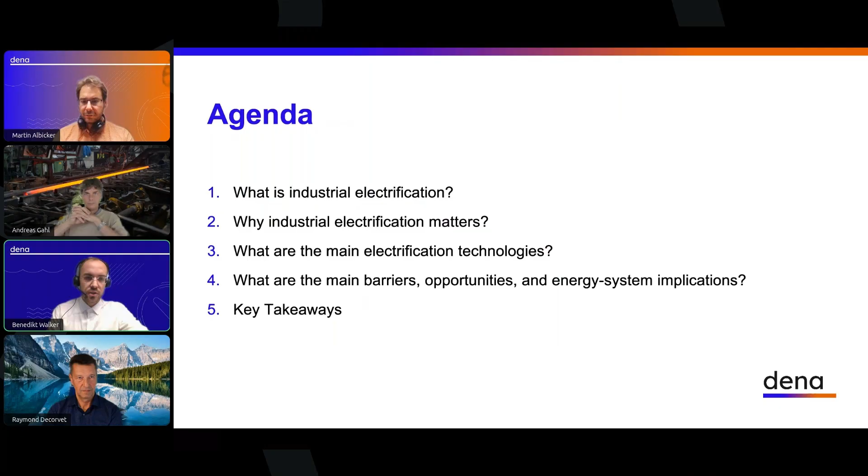To give you a bit of context on what the German Energy Agency is doing and who we are: we're a publicly owned company founded in 2000 by the German government. Since then, we have implemented a wide range of projects in over 60 countries and are currently working on over 100 of these projects. In general, we mostly consult the German government in terms of strategy and advice.

We conduct studies and analysis for the German government, but also for private stakeholders, do market analysis, and have a pretty extended network, primarily by organizing stakeholder processes. We also have a communications team working on reports and informing the public on energy transition topics. Our agency is structured along a wide range of energy transition topics, and most importantly for this topic, we have a division working on the transformation of the economy and industry, where we work on industrial electrification, process heat, and so on.

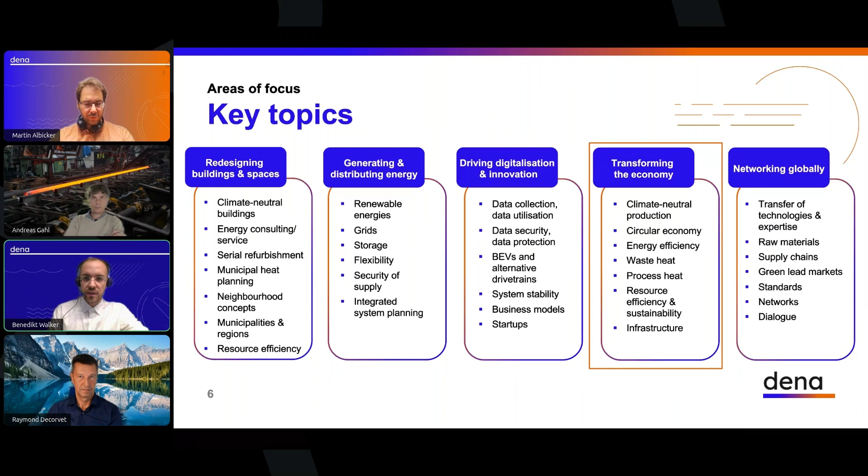So to come straight to the topic, what is industrial electrification? It essentially refers to the replacement of fossil fuel-based industrial processes with electricity-based industrial processes. You can imagine it as replacing, for example, a natural gas boiler with an electric boiler. The statistics may be a bit different in different regions of the world, but today industry is mostly based on fossil fuels, both as feedstocks and for its energy demand. In the European Union, currently natural gas, besides electricity, provides the biggest source of fuel, and then a whole range of other fuels come after.

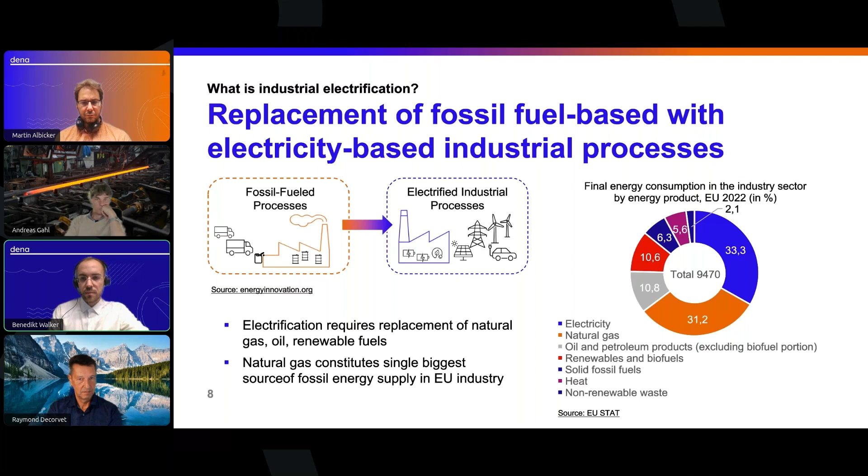In different regions these statistics may look a bit different, but the overall picture is similar around the world. So why does industrial electrification matter? Industry causes roughly a third of global greenhouse gas emissions. Totally, the world emits around 60 gigatons of emissions today, and industry is responsible for around a third of these.

You can see on the right that the largest part of these emissions is directly caused through industrial processes and energy production on site. Part of the emissions, the so-called Scope 2 emissions, is indirectly caused by industry - this is essentially the energy provision to industrial sites.

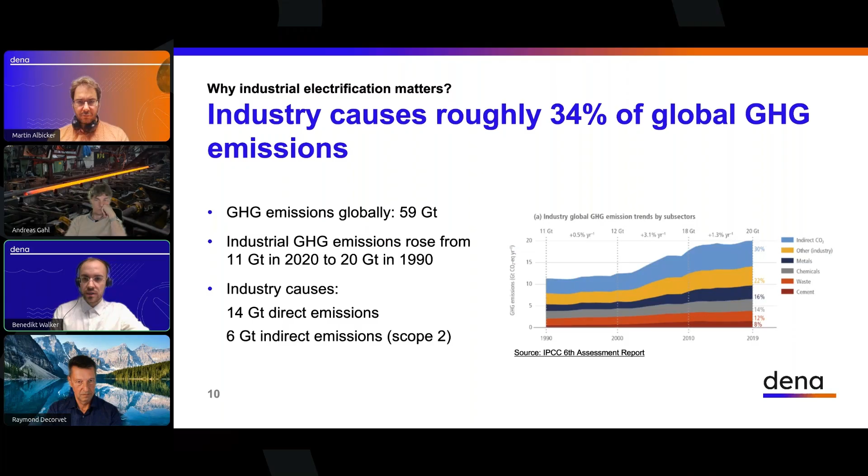To tackle these emissions and become climate neutral, different geographies and territories need to reduce emissions. These emission reduction pathways look similar around the world. The biggest chunk of emissions needs to be reduced through energy efficiency and renewable energy integration, and here, integration of renewable electricity and industrial electrification are one stepping stone.

Then there's another part of emissions that cannot be avoided through electrification, where we need carbon capture, utilization and storage, and another part that we may need to compensate. But those really are the smaller shares of total emissions.

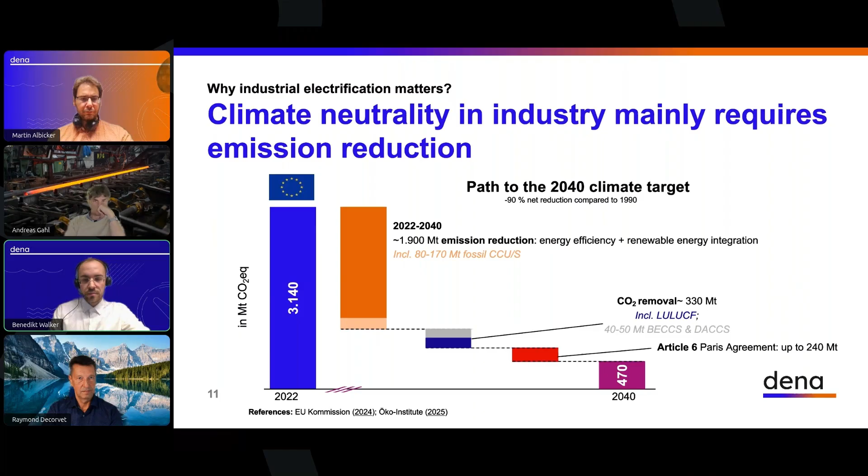So if we want to tackle the largest part, namely emission reduction, and look at the emission profile of industry, we see that industry mostly today uses energy for process heating - the heating of industrial processes. A small part often coupled with it is space heating, and these two shares can in many cases be decarbonized alongside each other, which is already over 50% of industrial energy demand. Then there's around a quarter that industry uses for mechanical energy and lighting, which is often already electrified today, and so will be decarbonized as the electricity supply of industries decarbonizes around the world.

And then there's another part which is feedstocks, and those are more difficult to replace and often require either carbon capture and storage or compensation via carbon dioxide removal.

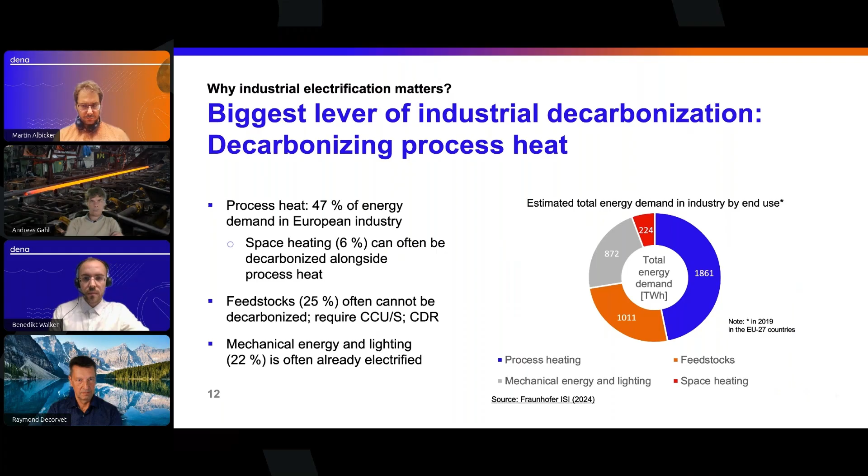So looking at how much of the remaining energy demand of industry can be electrified, there are some really interesting studies published on European industrial energy demand in the past years, finding that in the coming decades, as electrification technologies mature, over 90% of the remaining industrial energy use not yet electrified in the EU could be electrified, which really shows the very big potential of industrial electrification. Essentially only 7% of industrial energy use is without a technical electrification potential today.

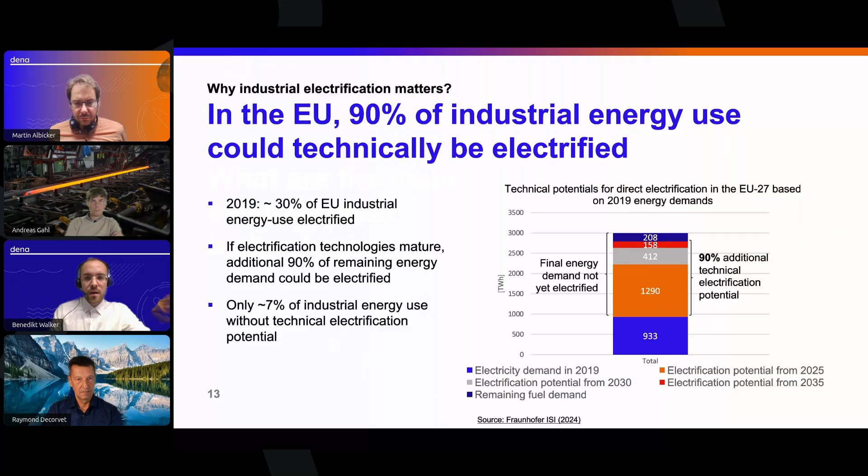On the other hand, there are also processes such as low temperature heat that are relatively easily electrifiable today, which, for example, I think Raymond will talk about in his talk later on industrial heat pumps.

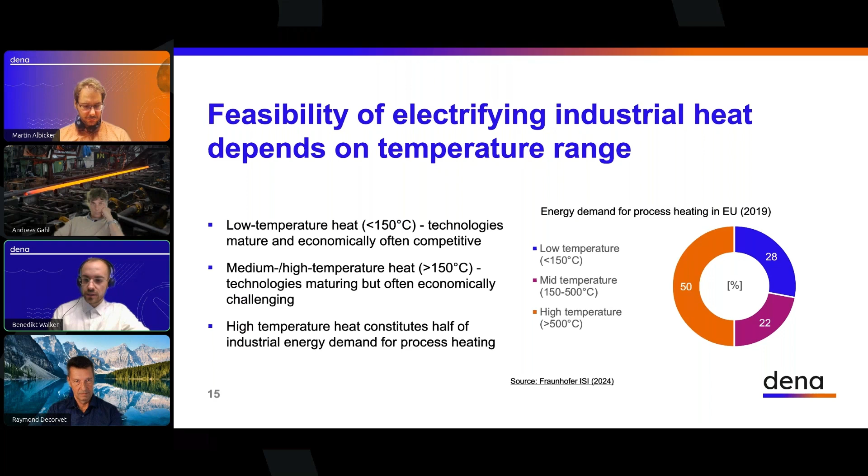In general, we see there are different technologies for different purposes that have their different advantages and disadvantages, for example, in terms of capacities and temperature range they can offer. This also means there is no one-size-fits-all solution for industrial electrification, but rather different technologies applied to different energy use cases, or even a combination of these technologies, which makes the whole process more challenging.

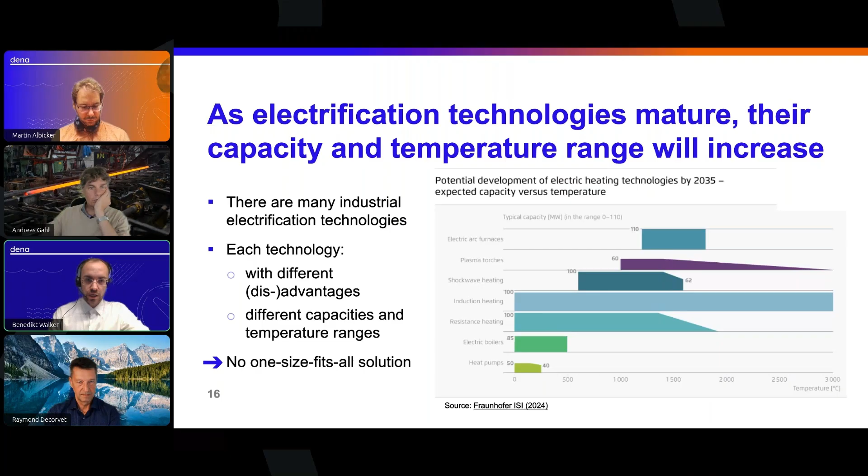Without going into too much detail about these technologies, I want to draw out some of the barriers, opportunities, and energy system integration implications on a higher level.

This also means that when there is high capital intensiveness, missing experience in these technologies is perceived as a risk, which increases the financing costs. As technologies are implemented and we gain more experience, financing and capital costs will decrease. Maybe surprisingly, an opportunity can often exist in coupling already capital intensive technologies with further technologies such as an on-site PV installation, a battery energy storage system, or thermal energy storage system, to better integrate these electrification technologies in the energy system, and therefore save on costs for grid expenses, and so on.

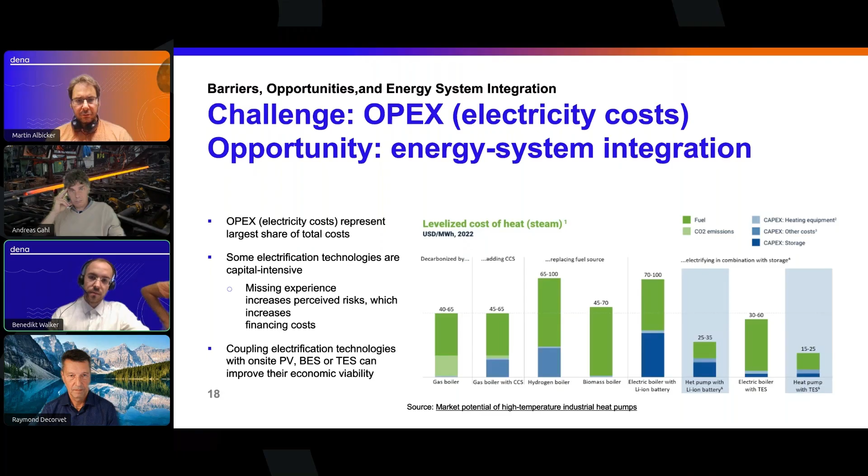As I said, OpEx, essentially the operation cost constituted by electricity prices, is so central to making industrial electrification technologies competitive with fossil fuel-based processes. Electricity then becomes the key focus to make these technologies economically viable.

So a lot of effort today is not only going into making industrial electrification technologies competitive with fossil fuel-based processes, but also making electricity prices globally competitive.

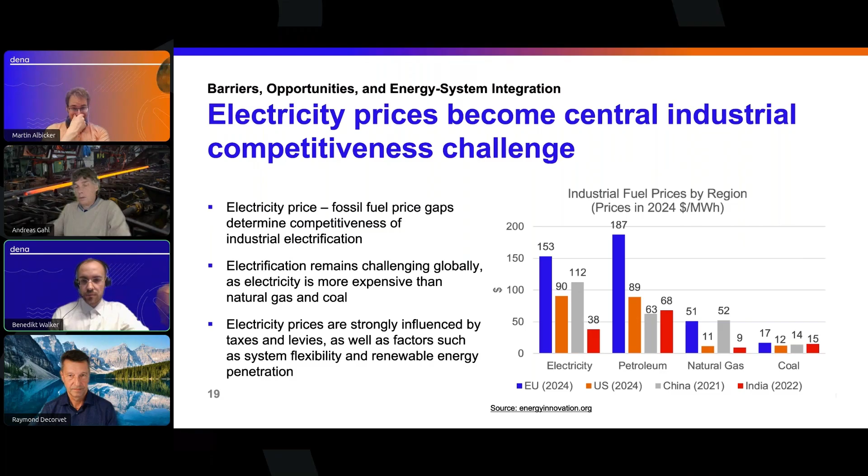As a result, and this may not be surprising, electricity demand is poised to increase around the world, not only as industry electrifies, but also buildings and transport. In the European Union, for example, it is estimated that industrial electricity demand will increase from around 900 terawatt hours in 2021 to around 1,500 terawatt hours in 2050 - a really large increase, which by extension means you also need to extend the electricity grids.

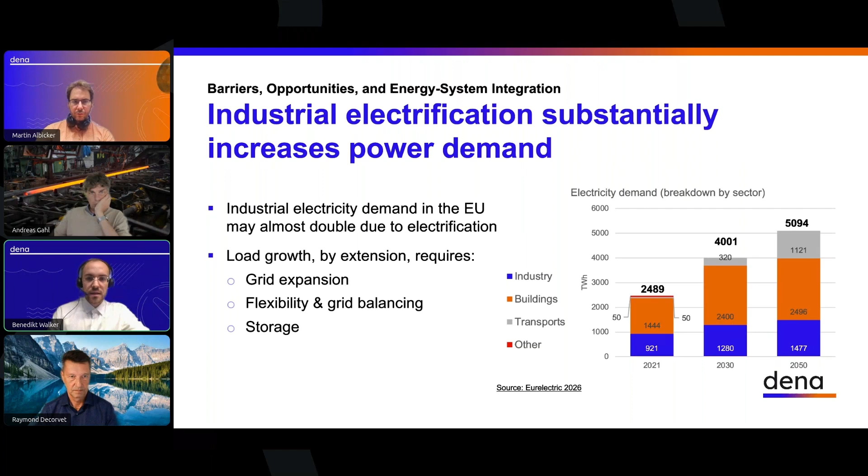There's an increasing need for flexibility, grid balancing, and electricity storage. One of the opportunities that comes along with it is that as industry electrifies, new markets for industrial electrification technologies are created or grow. McKinsey, for example, estimates that revenues may reach 1.4 trillion US dollars by 2030.

Interestingly, those revenues are not necessarily generated through the industrial electrification technologies per se, but also the larger energy system, where, as I said before, transmission and distribution grids need to be extended, so a lot of revenue is also generated across the infrastructures of the energy system.

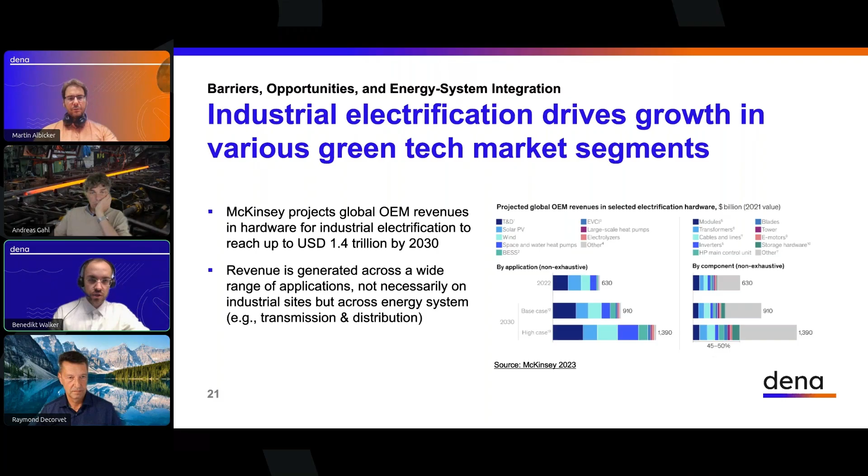One of the benefits of industrial electrification is that it's really not only an economic opportunity, but comes with a lot of co-benefits. Since we replace a combustion process with an electric process, there are no emissions at work sites, which means improved conditions for workers. The processes can be better controlled, they are less dangerous. We decrease pollution in industrial areas, and by decreasing dependence on international fuel imports, we can also increase the resilience of national industries.

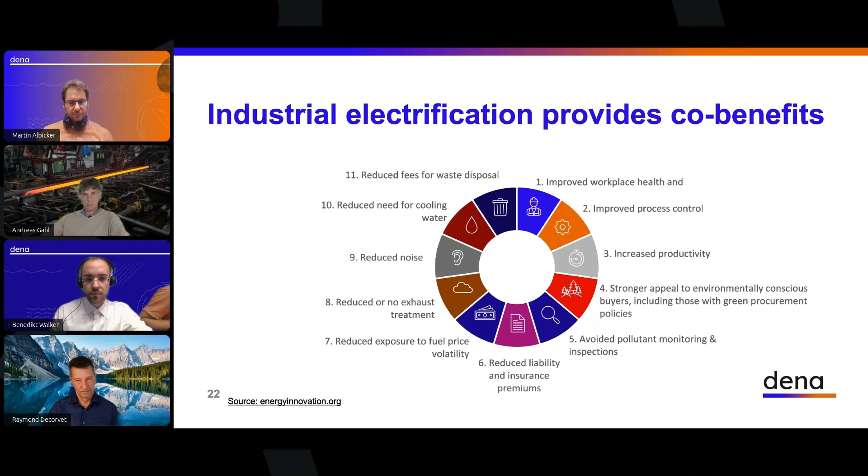To finalize this short overview, electrification is an increasingly sought after decarbonization pathway. It holds a lot of opportunities, especially in low temperature applications. Electrification technologies are already economically viable in many cases, whereas high temperature heat constitutes a more challenging case, and unfortunately also the biggest share of industrial energy demand.

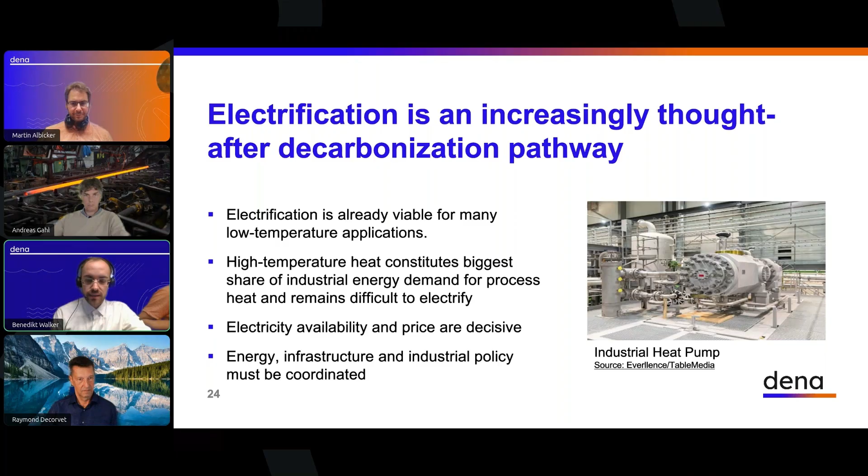To make electrification economically viable, electricity prices and the infrastructural conditions to install electrification technologies are key. This means that industrial electrification really needs to be looked at from a diverse policy perspective, integrating energy, infrastructure, and industrial policy perspectives.

Thank you very much for your attention, and I look forward to answering your questions.

Okay, we are a small, privately owned company. We are not part of a big group, so that it's important because we don't have unlimited financial resources to invest everything. So we have roughly a turnover of 36 million euros per year and a staff of 150.

MPG is a successor of a very old company. The first company was founded in 1866. So it's a very traditional business we do.

And what are our markets we serve? So we supply mostly, of course, in the European Union, but as well in the US, Far East and MENA region. So that means that some regulations like CBAM don't support us very strong.

What are our products? Our main product is a tube from copper alloys, from diverse copper alloys. And in addition to this, surface structure tubes for heat exchanger tubes, for heat exchangers, also for big heat pumps.

And what are the main key features? So of course we are very energy intensive, and as we are in international competition, we have to compete against mainly Indian, Chinese companies, also one company in Mexico and Japan. So we are in a very competitive market.

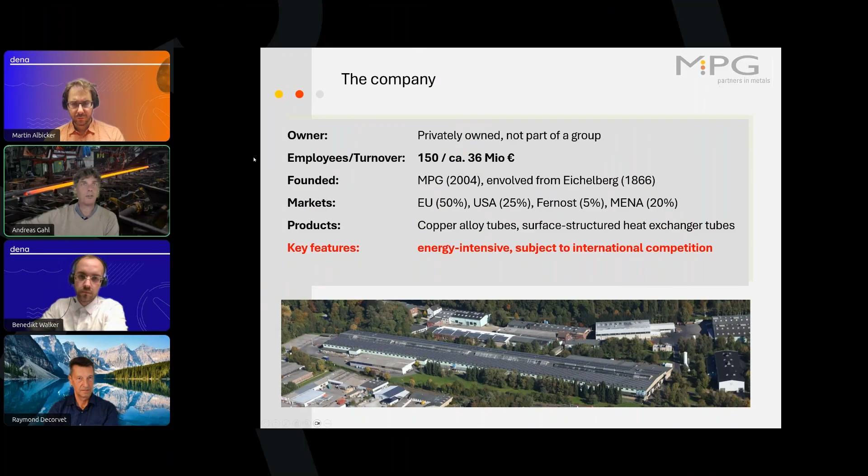In spite of that, I will introduce a little bit our production process. We buy raw material like copper, nickel, and zinc and mix it to the copper alloys. The first process is to cast only the copper alloy. The second step is to press a mother tube from the blocks of the diverse alloys. The next one is to roll it, to draw it, to straighten it, to get the final dimensions of the tubes and the finishing processes.

Our capacity is around about 180 tons per month for these final tubes, or heat exchanger tubes. Additional to that, we can produce mother tubes, another 200 tons per month.

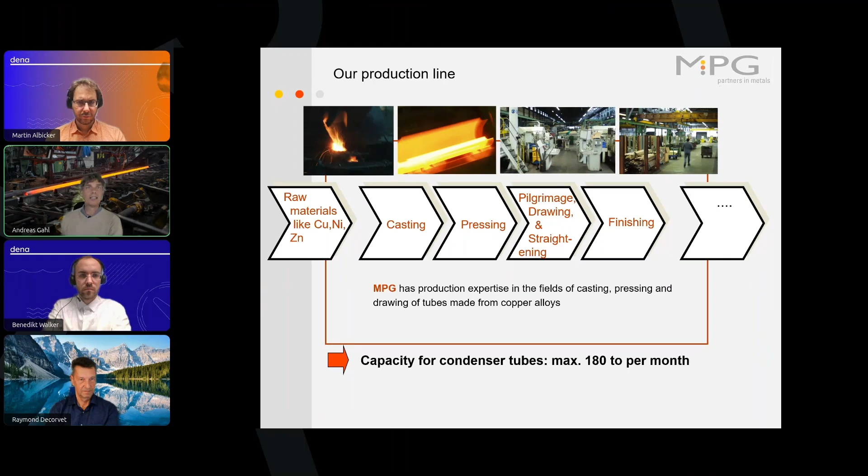So what are our sustainable goals? Only for introducing that, we decided to become greenhouse gas neutral by 2030. That means scope 1 and 2. And we would like to try to achieve a goal of minus 75% scope 3 upstream.

That is point 2. We will reach this by setting up closed material cycles for all of our products. So since 2022, we offered to our clients to get back or to buy back every material we have ever supplied in the past.

Sometimes 40 years ago or 30 years ago, and that is a base that we can use CO2 neutral pre-material, so that makes around about 75 to 80% of our Scope 3 upstream emissions.

A little bit special maybe, I'm the main shareholder, so we decided our company goal is that we have to produce THG neutral, under the condition that we also make profit to finance this transition of the company. But the main goal is really how to become CO2 neutral by 2030.

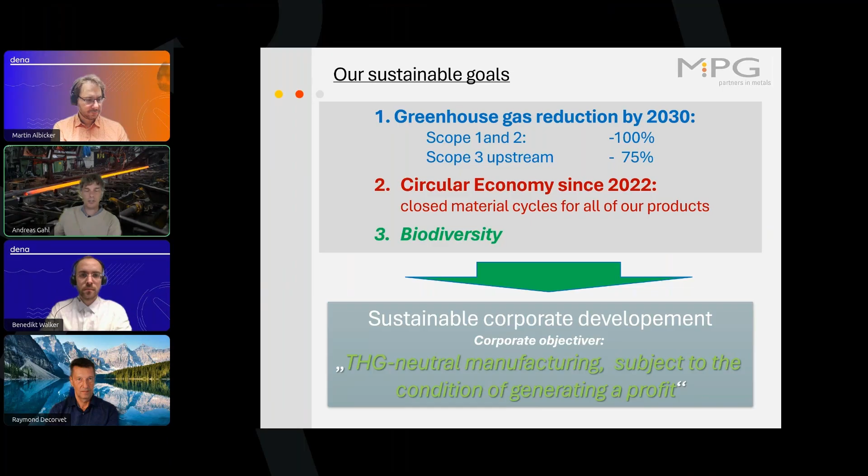What have we done in the past? Of course, the first one is improving energy efficiency. That's the main important point in my perspective as well.

One of the main points is also to renew the cooling systems and to prepare it for using the waste heat in the future. Another point is, of course, we have to optimize our manufacturing quality. That means if we can reduce our rejection rate in the final products by 1 or 2%, 1% means we have to cast 60 to 80 tons less per year, 2% means 160 tons, and that's really a relevant amount for saving energy.

And yeah, the modernization of heating systems in general, that's one of the biggest programs we started, but we have a lot to do. The second one is, as Benedikt Walker mentions as well, we expanded our own production.

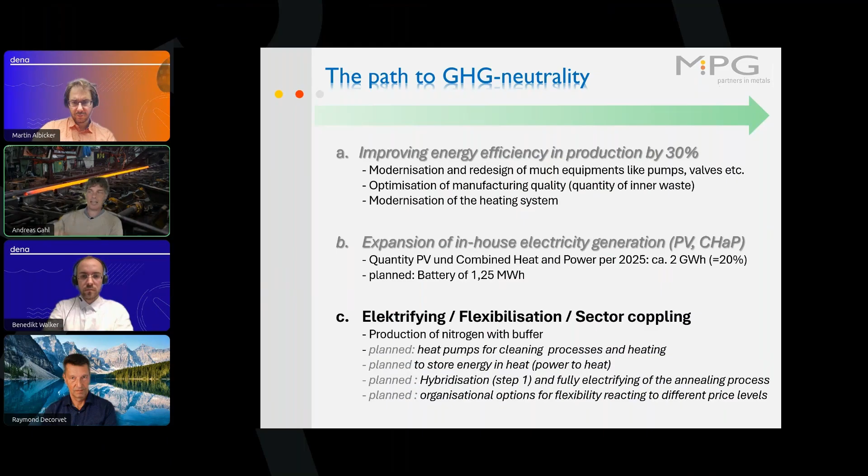I would like to introduce it a little bit in detail. The annealing process means we have a temperature level of 500 to 870 degrees, depending on the alloy we have to anneal. And of course, the final target is to electrify this fully.

But in the meantime, I can imagine that we can hybridize this process by adding some heat elements powered by electricity, additional to the heat elements powered by natural gas. So then we can decide if the level of the electricity price is very low, lower than natural gas, we can stop some natural gas powered heat elements and use the electricity ones. The complete electrifying of two ovens costs around about 400,000 euros.

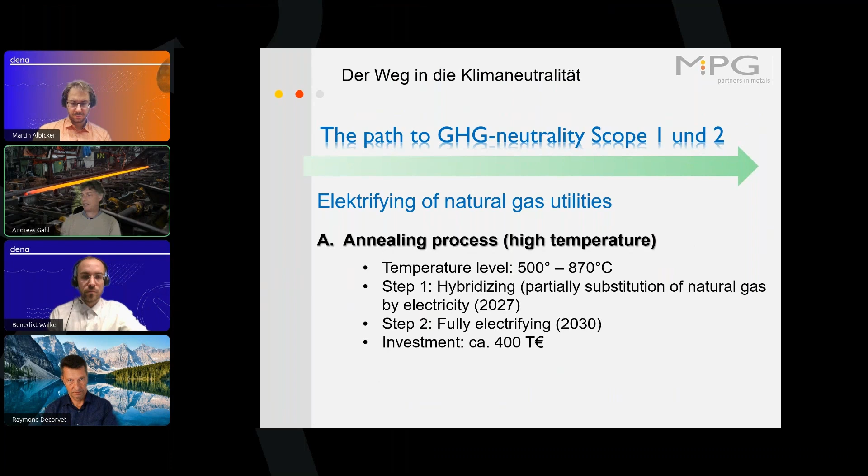It's not so much, but in this case, and then I came to the barriers, the OPEX, as Benedikt has mentioned, is the main problem because the electricity costs are generally 3 times more expensive than the net cost for natural gas. So what can we do to meet this challenge or to find a solution for that?

In the meantime, we thought about hybridization. That means that we can really use the times the electricity price is lower than the natural gas price. It's more and more in Germany, so you can see it more and more.

But that means that we have to sign so-called PPAs with flexible prices, power purchase agreements based on renewable energies. So next year, beginning from next year, we buy 80% from these power PPAs, and then we have 20% free, so we can use the flexibility. If the price is very low, then we can buy additional electricity quantities to use this low level.

And another point is that we can also use power to heat to store the electricity if the electricity price is very low. So that's another kind of storing electricity when it's very cheap.

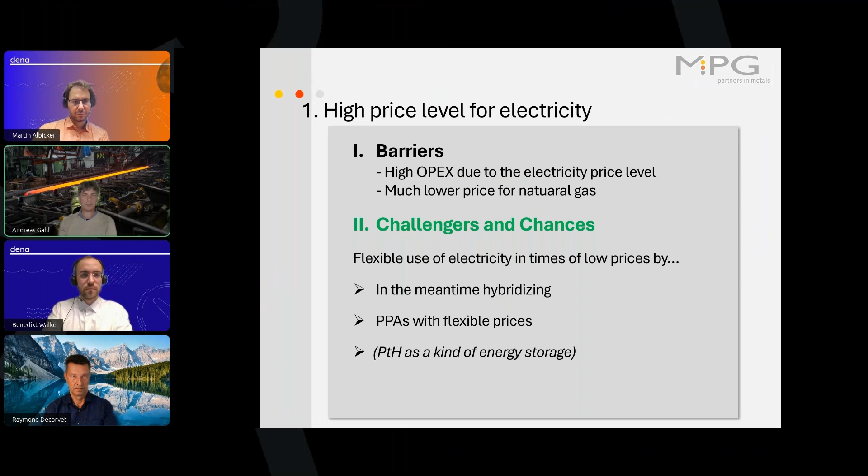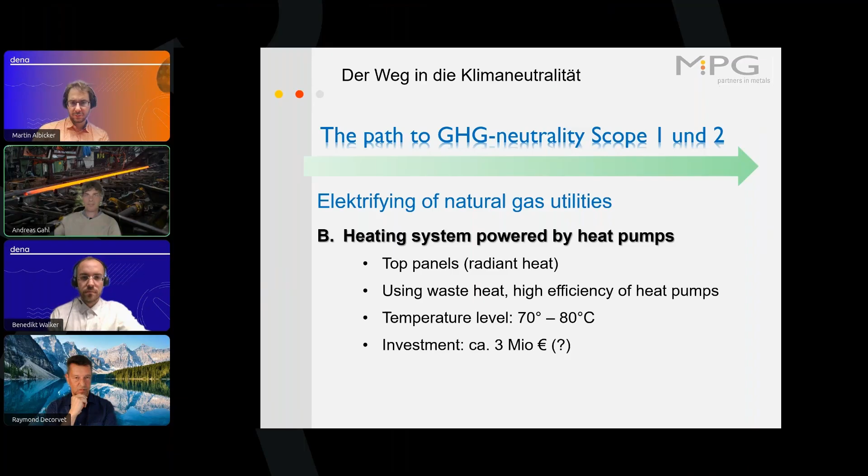But the big problem is that it's a very big investment, and that's another kind of problem we have in a small size company. The main challenge is that most of these investments have a very long time of return on investment, more than 10 years or something like that.

And for small companies like ours, there's a limit for loans. So normally we have to finance this by loans, but based on the regulation of the banks in Germany, it's very difficult to get more loans if you have achieved a special amount for loans, and then there's a stop.

So we really have to discuss how to finance these big investments, and these investments have a very long return on investment. And on the other hand, these investments mean that we have to reduce our resilience due to the fixed payoff for the credits. So that's really a problem, because if over 20 years we have to finance this investment...

...in this time it's for sure that there will be minimum one crisis or something like that. So maybe there's a time of 1 or 2 years we have a lower turnover, and it will be difficult to cover these expenses. So that's really also another big issue for our small companies, how to keep our resilience for such times of crisis.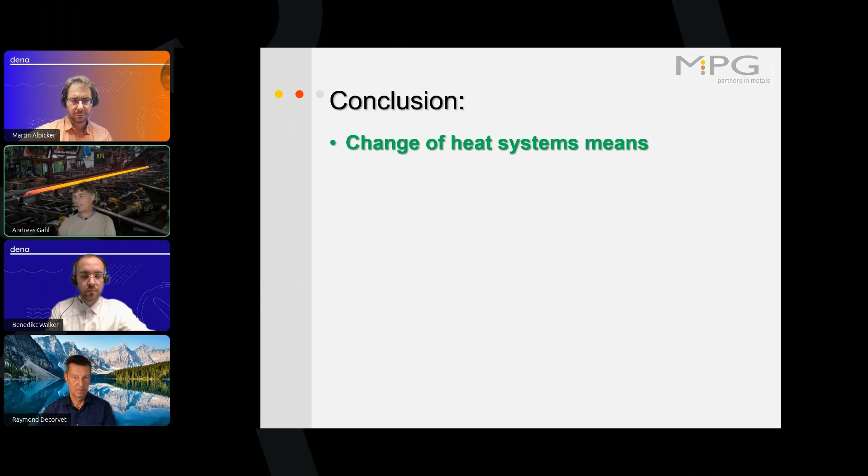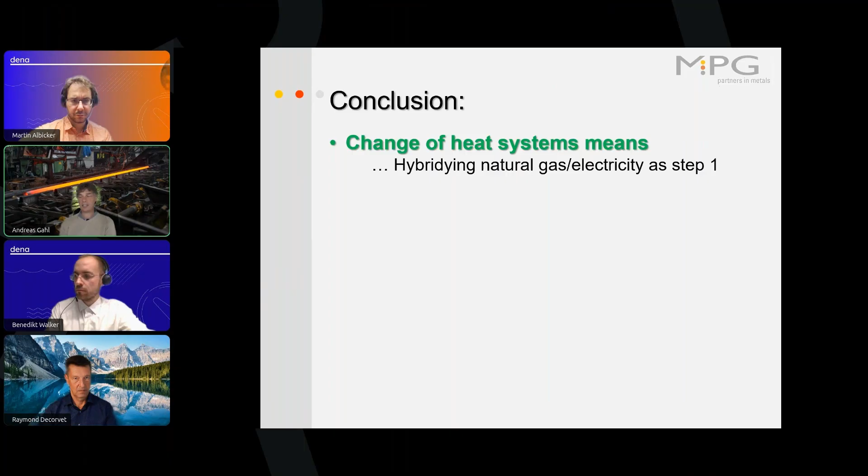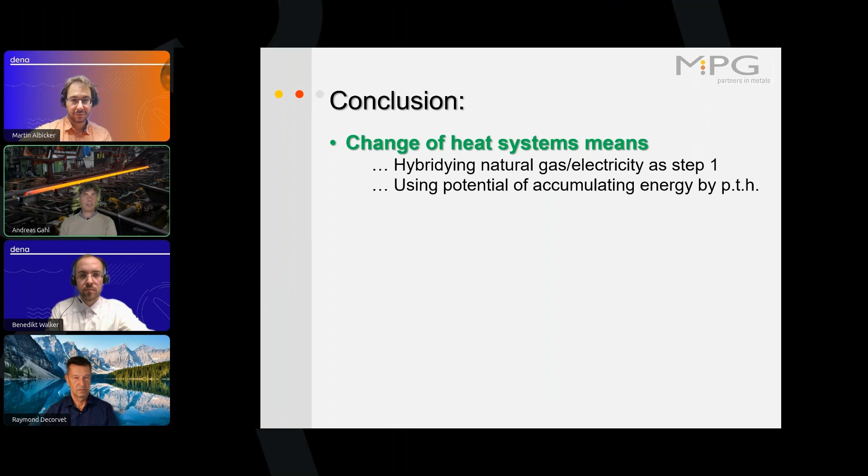So to summarize my presentation: change of heat system means maybe there are some possibilities to hybridize natural gas versus electricity as step one before you fully electrify the processes. There are a lot of potentials to accumulate energy, for example by power to heat. And of course, everything based to use it also economically.

It's necessary to close PPAs with flexible electricity price so that you can use really this potential which is given by the floating energy prices.

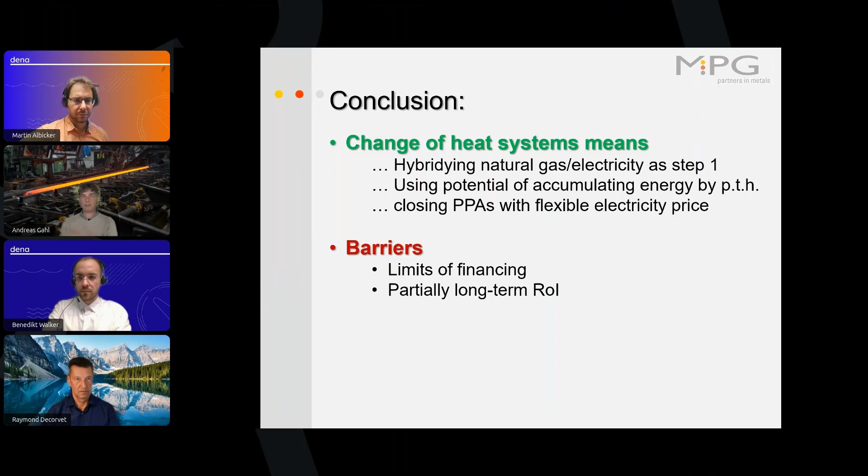Barriers are, as I told you, the limits of financing this big investment of transition, the often long-term return on investments. It's not easily financed over 5 years or maybe 10 years - sometimes we need loans over 20 years. That could be a problem. And the reduced resilience due to these fixed costs based on the credits, it could be a problem in times of crisis for companies like ours.

And of course, what Benedikt also mentioned, the additional costs for higher electricity price level caused also by high grid costs - not only the energy costs by itself, but also the high grid costs are in Germany a problem to really substitute gas by electricity.

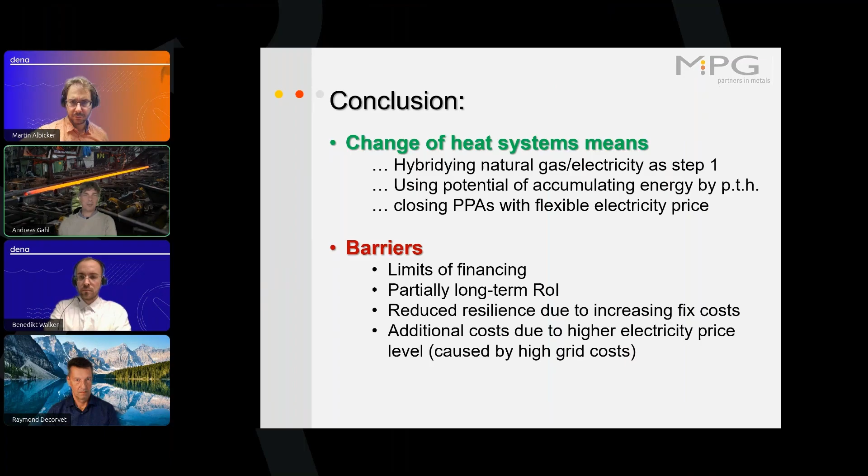Okay, I hope I could explain everything so that you can understand it. So, are there any questions?

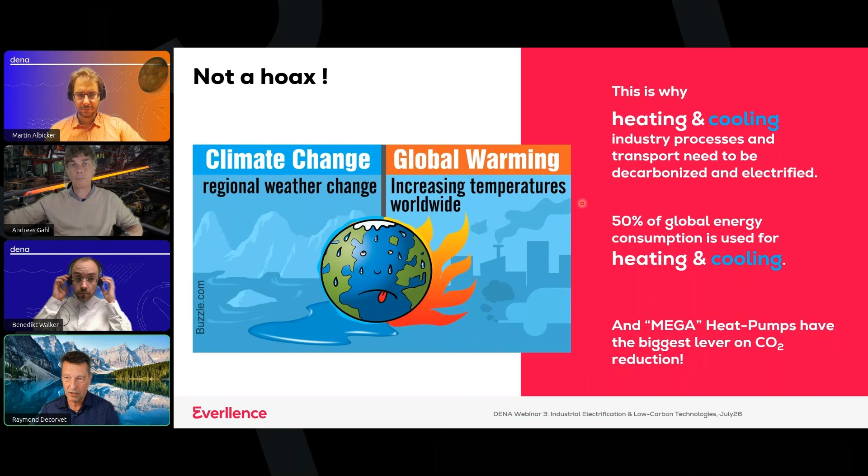So climate change and global warming, this is not a hoax, and we have to fight this. Why? Because heating and cooling in industry processes, transport, needs to decarbonize and electrify. This is the whole topic we are talking about today. 50% of all global energy consumption is still used for heating and cooling. Mega heat pumps, as I call them, have actually the biggest lever on CO2 reduction, as you will see in a minute. The future is electric.

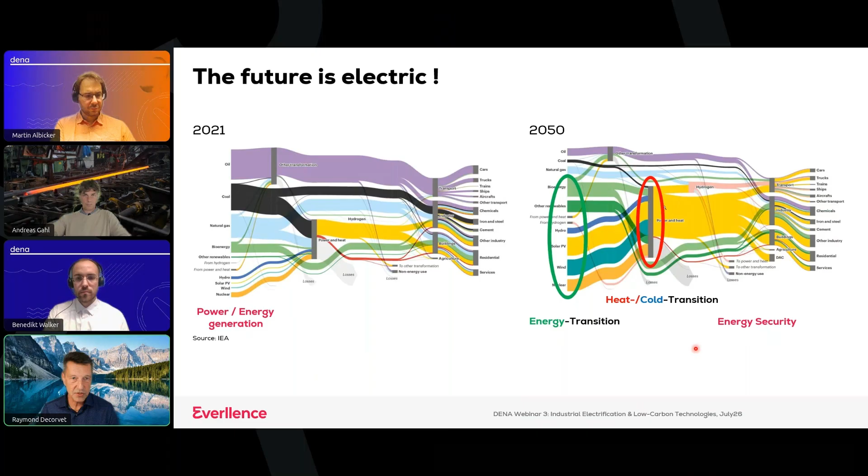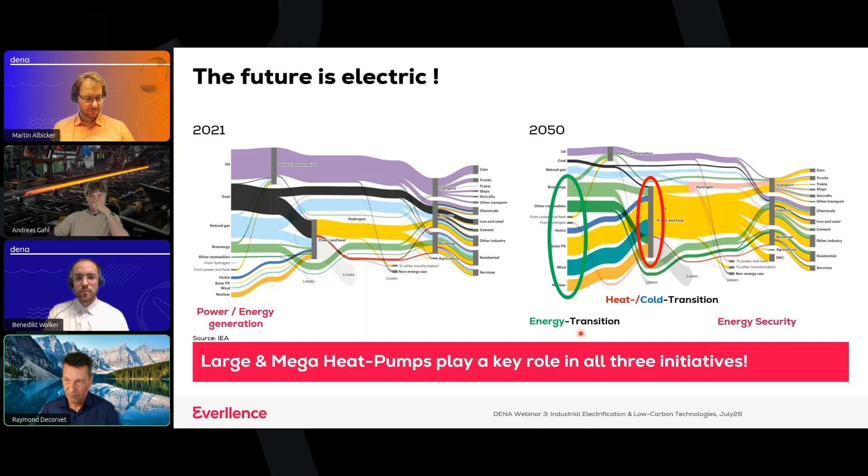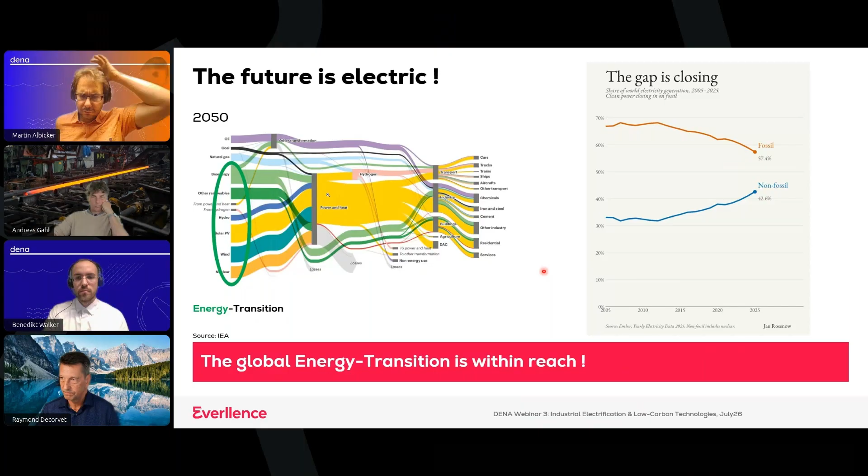Coming back to the energy transition, there is a big chance that we actually really can achieve the goals until 2050. Focusing on the energy transition, this is the global map of how it looks: non-fossil power production is going up, while fossil power production is coming down, on a global scale. But what's going on in India is exactly the same: renewables power production is moving up, while fossil fuel power production is, let's say, stable. This is going into the right direction, and that's why I believe the energy transition is also within reach, even in India. And by the way, you are doing much better than what we are doing in Switzerland.

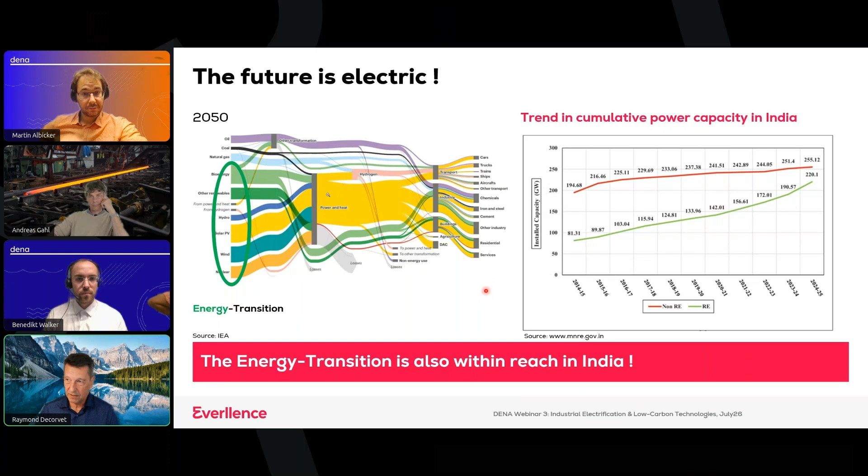The 21st century, I call it the age of the mega heat pumps. A while ago, I was searching the net for the best innovation of all mankind. Of course, there's the wheel, electricity, steam engines, telephones, whatever. I couldn't find heat pumps, but I believe they really deserve to be named on this list. So I became bold and claimed the 21st century the age of the mega heat pump.

Why is this? What makes this technology so unique? Well, there are a lot of reasons. The technology is known for 170 years. It's a proven, robust, and reliable technology. Concurrently, we can decarbonize the generation of heat and cold at the same time.

It is sustainable and environmentally friendly if we use natural refrigerants. It is highly efficient, especially when using both the heat and cold output. Typically we only use, mainly in Europe, the heat, but the cold is also energy we should use. Heat pumps work in all parts of the world, also in India, supporting the energy and heat-cold transition.

In the meantime, fast developments have taken place, and today industrial heat pumps can provide huge and high temperature outputs. It is a secure, resilient technology with a long lifetime. We anticipate for our products a lifetime of at least 35 years, maybe 40, even 50 years. It has source flexibility, so we can use natural, infinite heat sources or even waste heat recovery to power a heat pump. And it fosters energy security by lowering dependence on fossil fuel.

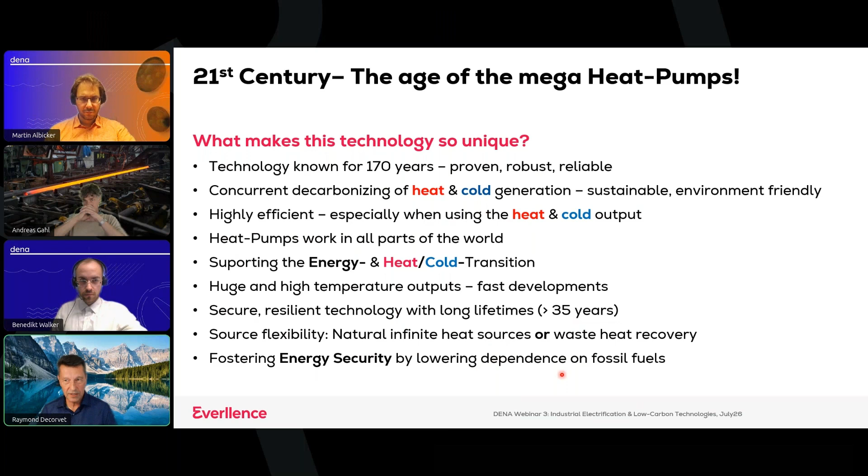But this is not enough. There is much more to say about heat pumps. If we put the heat pump here in the center, we provide heat and cold at the same time.

So in India, I understand you don't have district heating, what you need is district cooling. But even a heat pump can provide district cooling. By supplying the heat for industry, for a process industry, the cold can go into a district cooling network if we want to, or it can cool a data center, or retrieve the heat from a data center as the heat source for the heat pump.

When combining with one single heat pump, maybe in an industrial park, we can touch several different industries and entities from different sources. This is what we call sector coupling.

So next, we go clockwise. We can integrate renewables, we had this before. In India, for instance, there is already 15% of power coming from wind and solar. And we saw the chart before. This is even increasing now.

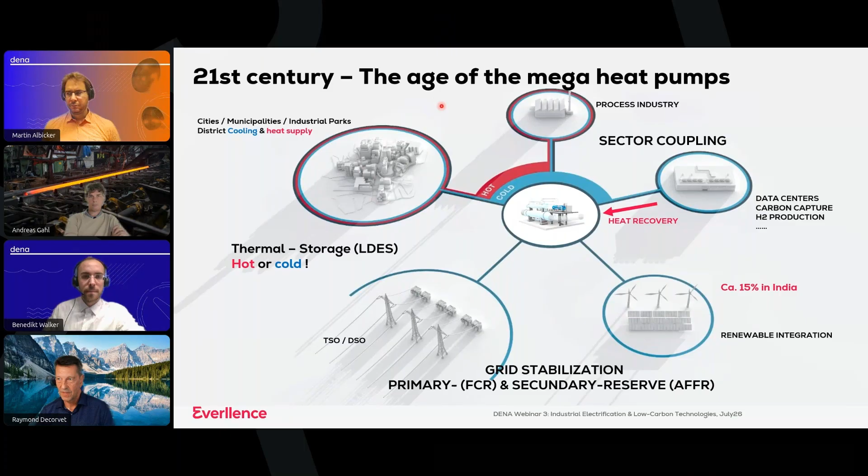So modern mega heat pumps, as I said, are now providing really huge and high temperature levels. Modern heat pumps can provide heating from 10 megawatts up to 70 megawatts with just one single compressor. They can provide steam or hot water up to 150 degrees if you want to. If it comes to steam for petrochemical, we heard about this - we are even able to provide steam up to 280 degrees today with a heat pump.

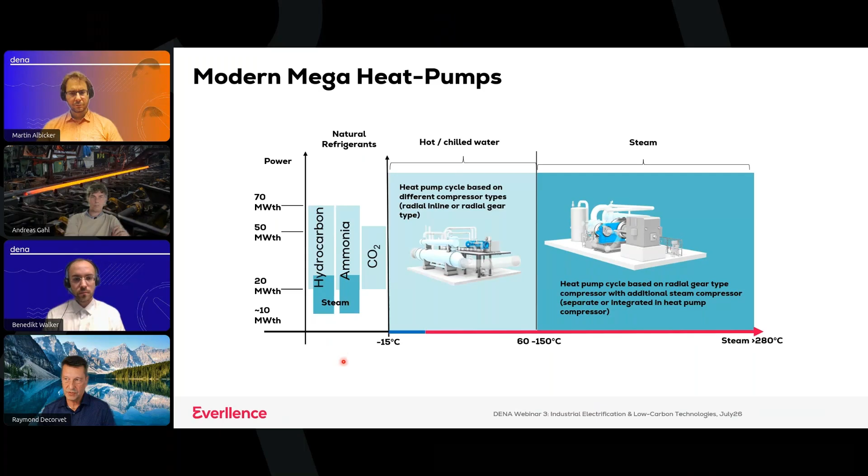When it comes to refrigerants, and I have a slide on that later, we should focus on natural refrigerants. When we look at the many different industry processes, most of them have a demand for temperature levels below 200 degrees. There are a few which go beyond, but we can even provide this with a heat pump. So with heat pumps for the process industry, we can provide hot water, chilled water, or even steam. There is no actual barrier anymore to using heat pumps in most industry processes.

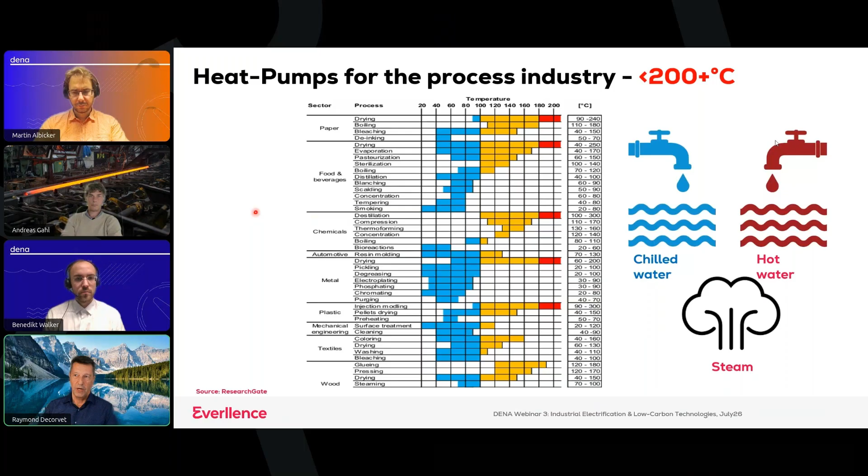When we talk about cooling and heating, it's interesting to know the difference between cooling, air conditioning, and the heat pump. To make it short, with air conditioning we are extracting heat out of a room or a data center, for instance. With heat pumps, we are generating heat and cold.

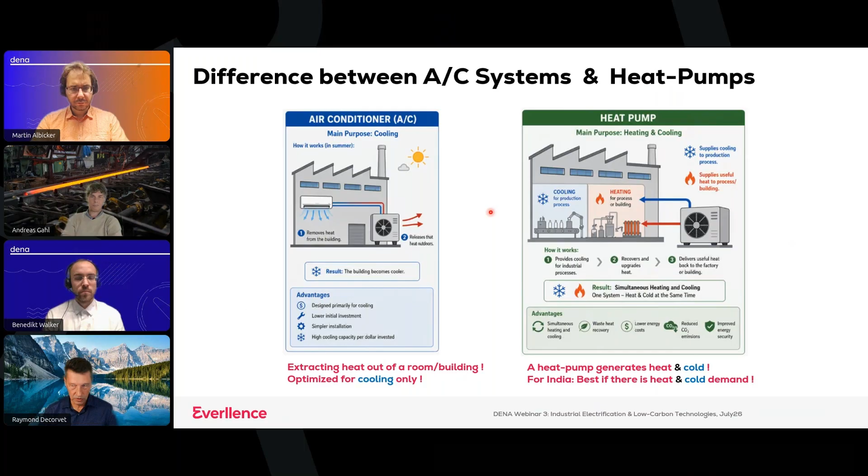Let me show you how this works. First, we need a refrigerant, a gas. If we compress the gas with a compressor, we generate heat. This heat is exchanged over a heat exchanger to the final recipients - this can be a process, hot water, or heating. Many different applications are possible. But when we expand the gas, which is still under high pressure, we receive cold. Then we use external heat sources to heat up the cold again before it gets compressed and provides heat again. This is the cycle we see here.

The natural heat sources can also be manifold, and I'll show this later on in another slide. Now let's talk about the efficiency.

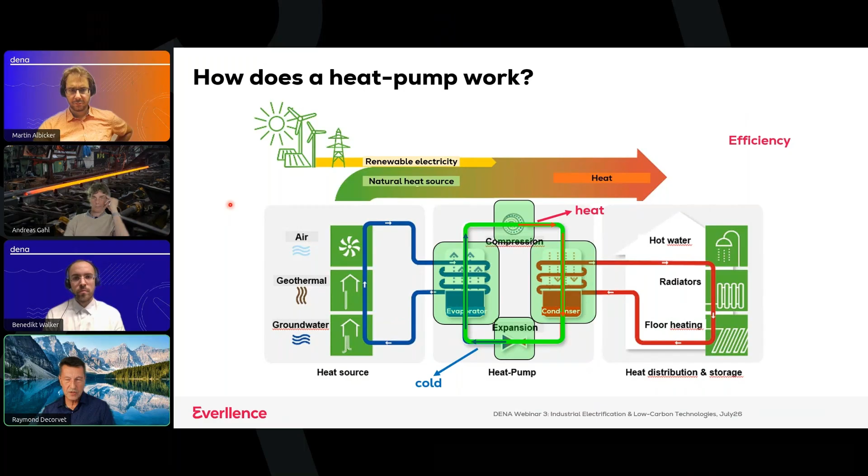The efficiency is great, and we differentiate a hot COP. COP stands for coefficient of performance, and it can be 3 to 4 or even more with large-scale heat pumps. What does that mean? A COP of 3 means we need only 1 part of electricity and we receive 3 parts of heat. But this is only one part of the efficiency, the hot COP.

But there is also a cold COP. Typically, the rule of thumb is it is 1 less than the heat. So we also have a cold COP. If we add them up, we can achieve with a single heat pump a COP of between 5 and 7, and even more. That means 1 part of electricity provides us 5 up to 7 parts of thermal. I think this is really great efficiency.

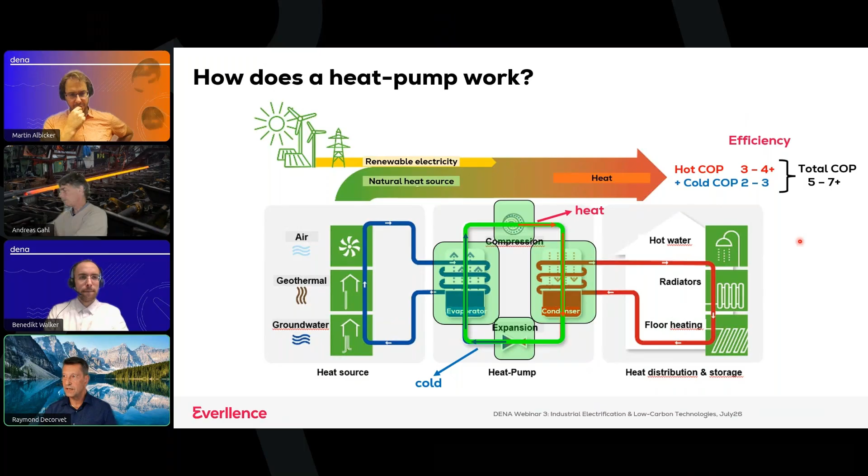So this is also one of our designs for our large-scale heat pumps. What we see here is again the evaporator, where we are extracting the heat from a natural heat source maybe. Here is the compressor, and here is the heat exchanger.

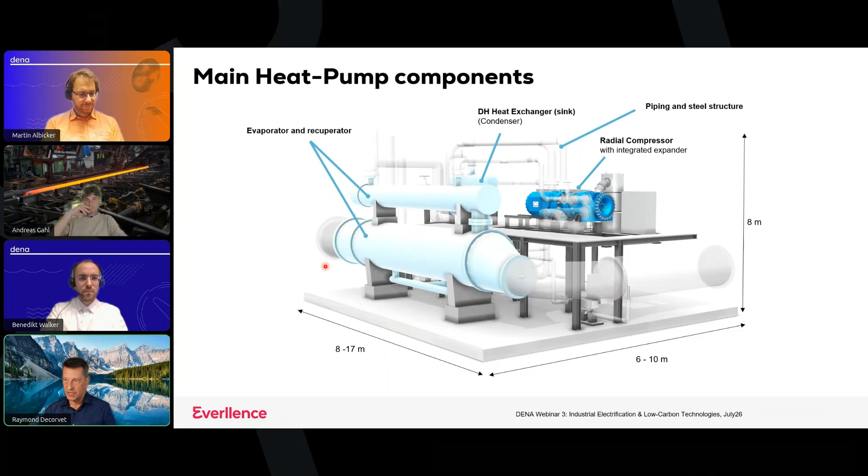We have several projects under construction, and one is in operation - this one in the upper left corner. I apologize, these are only district heating networks, not cooling networks. What I want to show you is the capacity. With just these 5 projects, and I cannot go into more detail because of time restrictions, we can supply heat to up to 660,000 people in Europe, so they have warm feet in the winter time. And with these 5 projects, we are going to save 500,000 tons of CO2 per year. There are more references going to come live soon.

I want to make an admission here. This is also true for our competitors - every project coming live, also from our competitors, is going in the right direction.

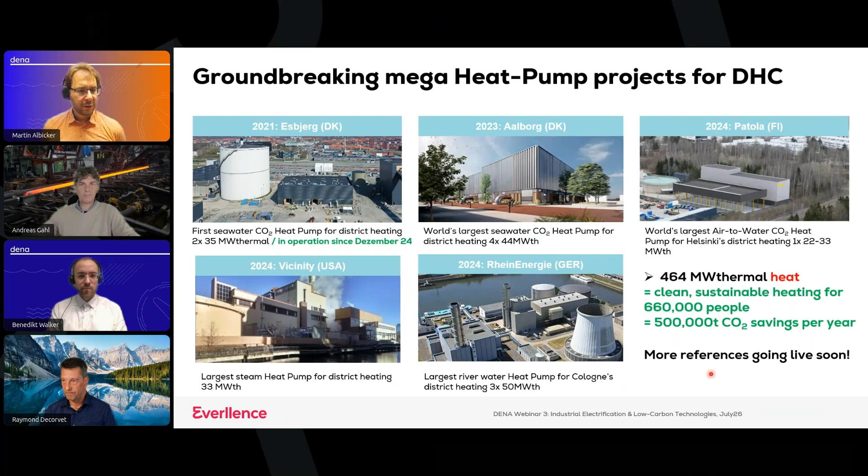This is how it looks inside our lighthouse project in Denmark, where we are providing heat to 25,000 households, with 100,000 tons of CO2 savings with just 2 large heat pumps, each providing 35 megawatts of thermal output.

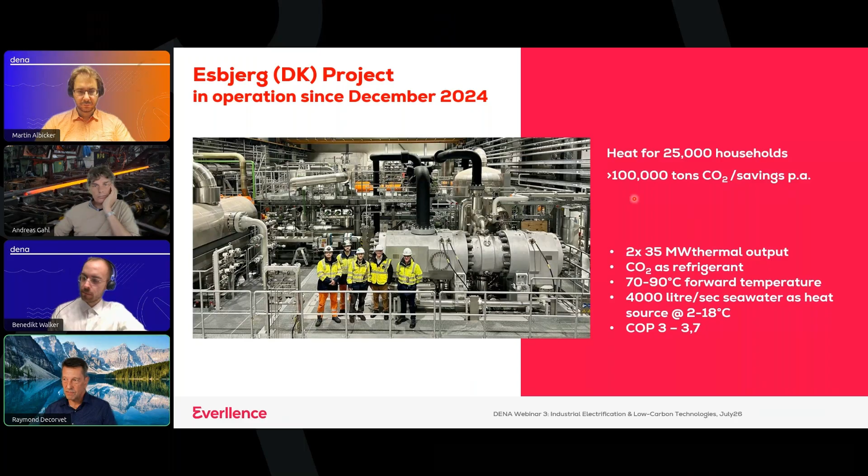And here are some ideas about technology. What you see here is the evaporator. This is where the heat source, in our case seawater, is going through, and where we extract 2 to 3 degrees to bring it up and lift it to 90 degrees for our district heating network.

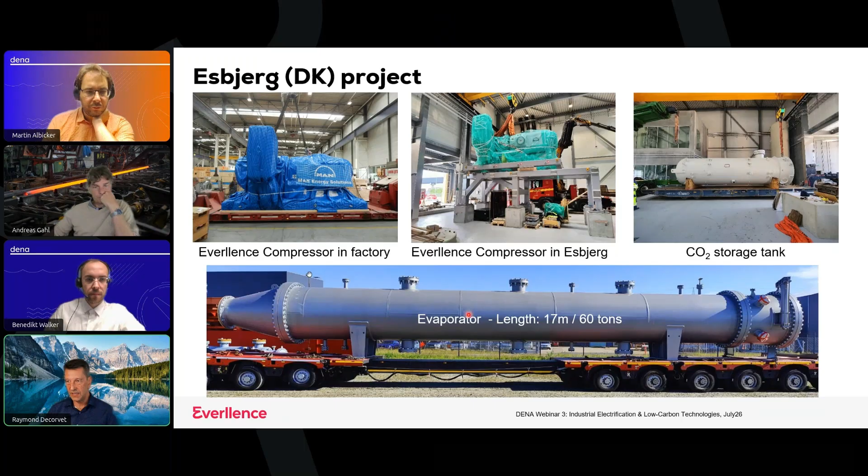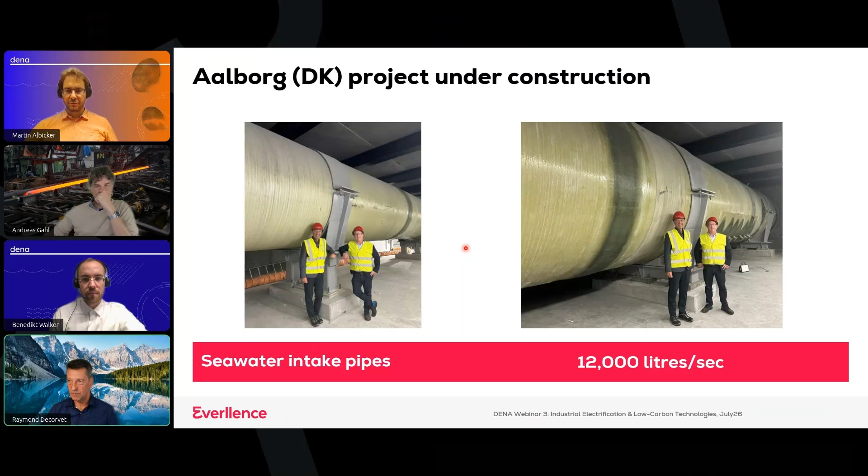This is the seawater intake for another project in Aalborg, which is even bigger. Now you can see the pipe here where the seawater is coming in, but it's getting bigger - there are 12,000 liters per second going through this pipe, where we can extract 2 to 3 degrees out of the seawater with our 4 large-scale heat pumps for the district heating network.

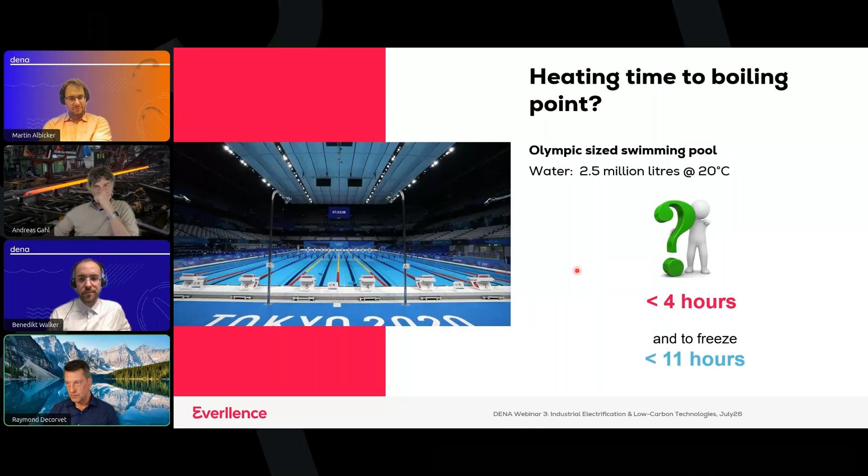Coming to the refrigerants, there is a lot of discussion. What I want to show here is that there are plenty of natural refrigerants which do the job, which brings us high efficiency.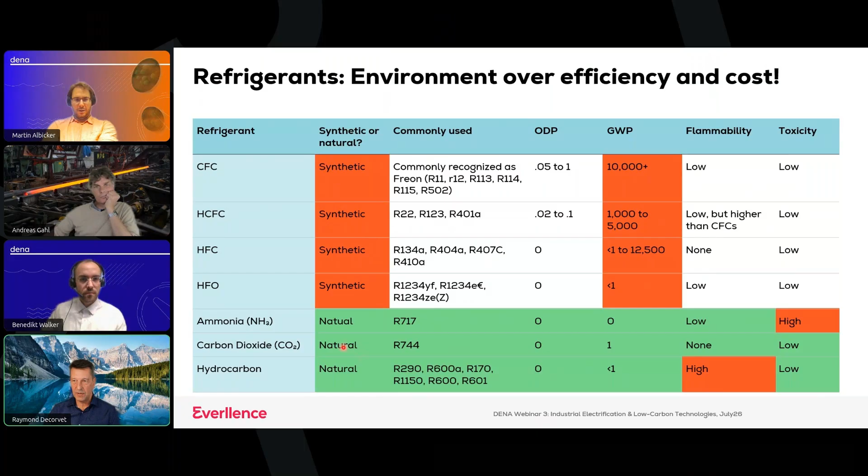So there is no need anymore with modern heat pump technology to go for synthetic refrigerants, which have some risk of persistent chemicals that may even cause cancer for us people. Wherever we can, we should avoid synthetic refrigerants, and they can be replaced by natural ones.

So what can be heat sources for mega heat pumps? Any type of water - it can be a lake, a river, seawater, but also sewage processing water. This is also a very good heat source. From all these sources, we can take out between 2 to 3 degrees to feed our heat pump. With sewage processing water, maybe we can even take out more, 6 to 8 degrees, in some projects we've seen.

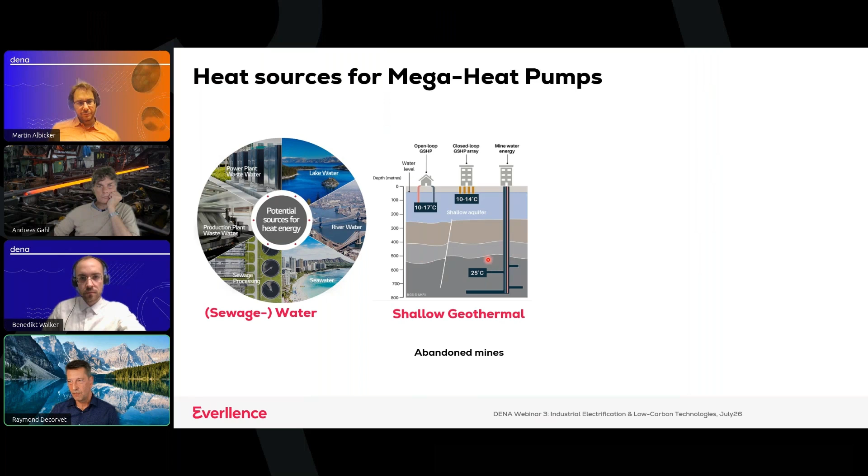But we can also have shallow geothermal, because we don't need to drill too far - 500, 600 meters already to get 25 degrees out of water from an aquifer or from a ground lake. Abandoned mines can also be a heat source for our heat pumps.

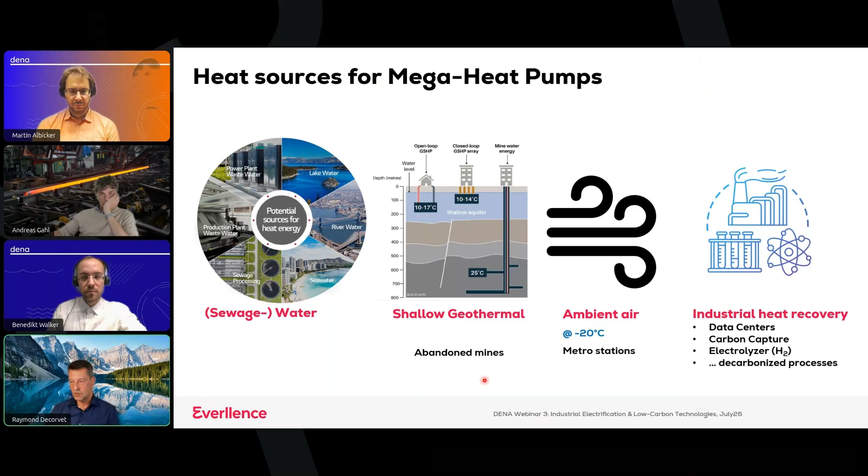It can also be ambient air. In Finland, for instance, imagine or not, even in minus 20 degrees there is some heat in the ambient air. It took a while when I first heard about that - that in minus 20 degrees ambient air there is still some energy we can use for a heat pump. But we can. And of course, we can use industrial heat also as a heat resource for our heat pumps.

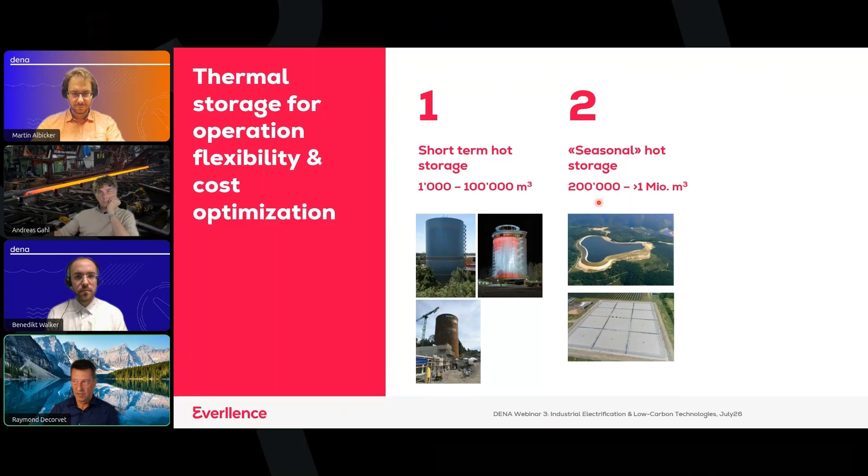When it comes to thermal storage, that makes a lot of sense because it brings us a lot of flexibility in our operation - we can have huge tanks. They can hold up to 100,000 cubic meters of hot water, up to 130 degrees if we want, when they are pressurized. But there are also seasonal hot storages - they can hold even more capacity, up to 200,000 or even 1 million cubic meters of hot water. And last but not least, we can also store chilled water and even ice.

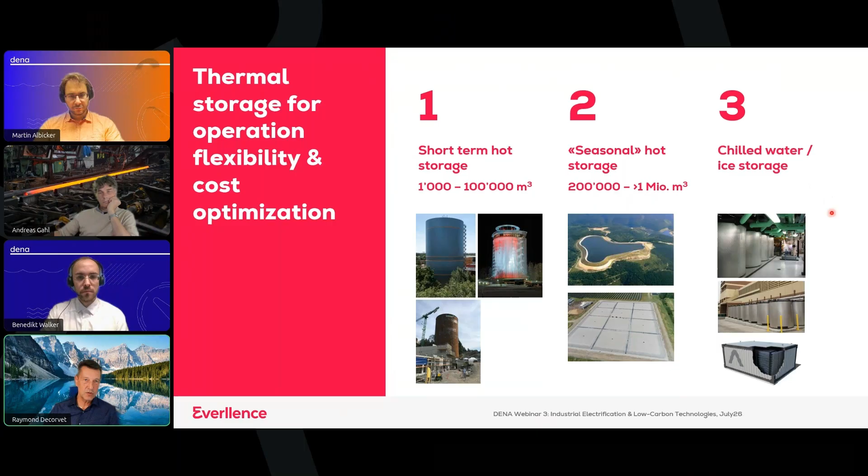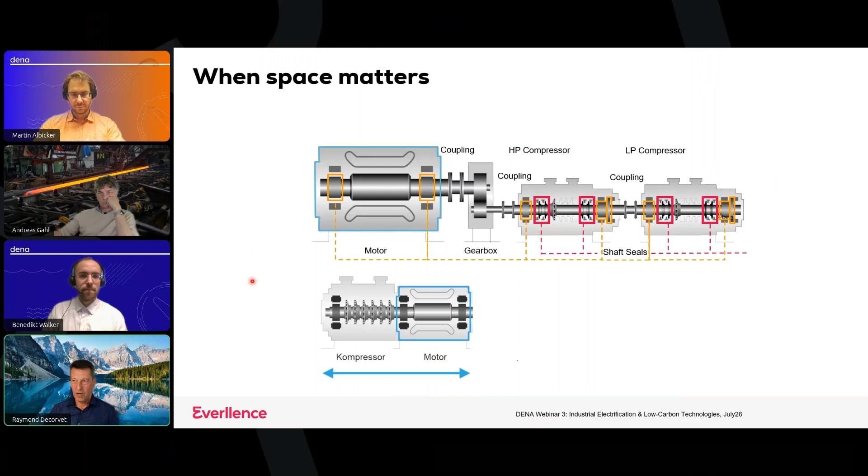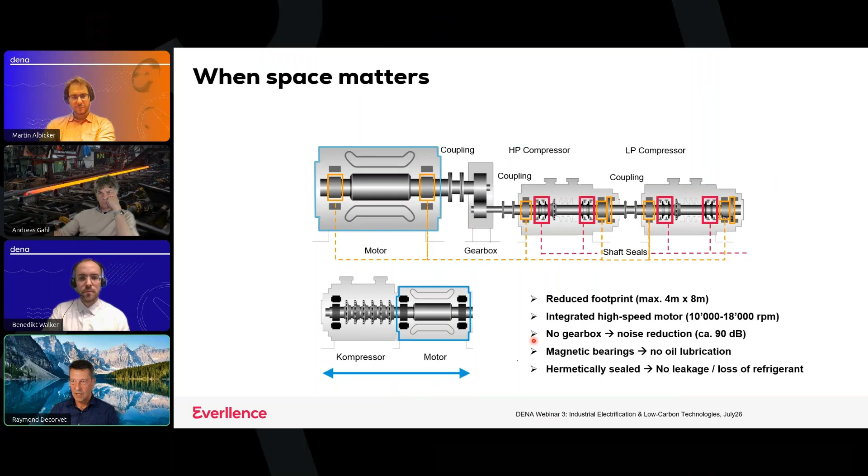With the integrated motor here, it is cooled by the refrigerant which is going through the whole system. This is the compressor, compressing the refrigerant up to 130, 140 bar if you want. What you can see here, the shaft is not coming out of the casing. This allows us to completely hermetically seal the whole compressor, which is important when using refrigerants because we don't want any leakage. And because of these magnetic bearings, we don't need any lube oil.

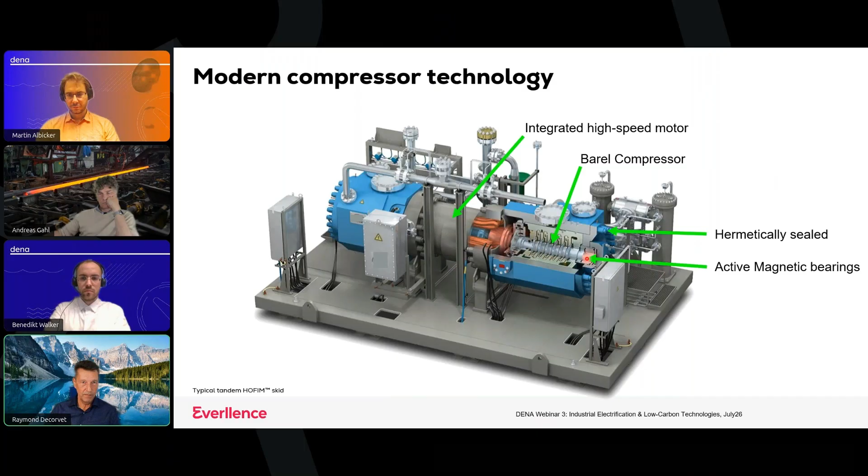But this also now allows us to participate in grid balancing. Balancing the grid has two meanings: first, to keep the frequency at 50 Hertz, and second, we have to balance the load on the grid.

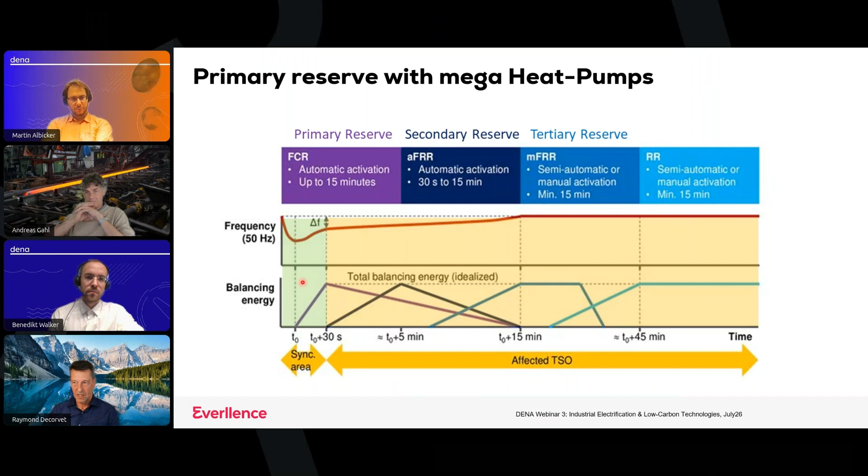So what is very lucrative for someone running a heat pump is this: the lower and faster we can provide grid balancing, the more you get paid from your grid operator. So how can we do that? With our products, with our modern compressors, we can provide grid balancing below 30 seconds. In our case, we can lower power consumption by 7 megawatts in less than 30 seconds thanks to these magnetic bearings, because we don't need to control any lube oil. Or we can increase the power consumption again by 7 megawatts in less than 30 seconds. And this is important for balancing the grid.

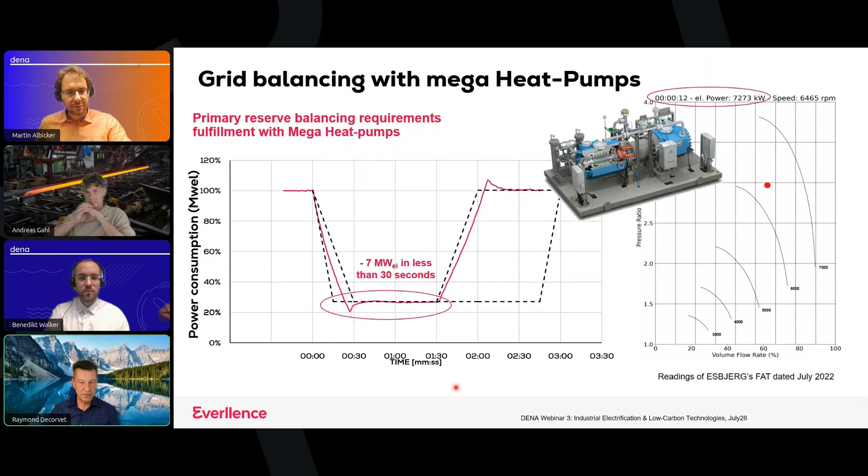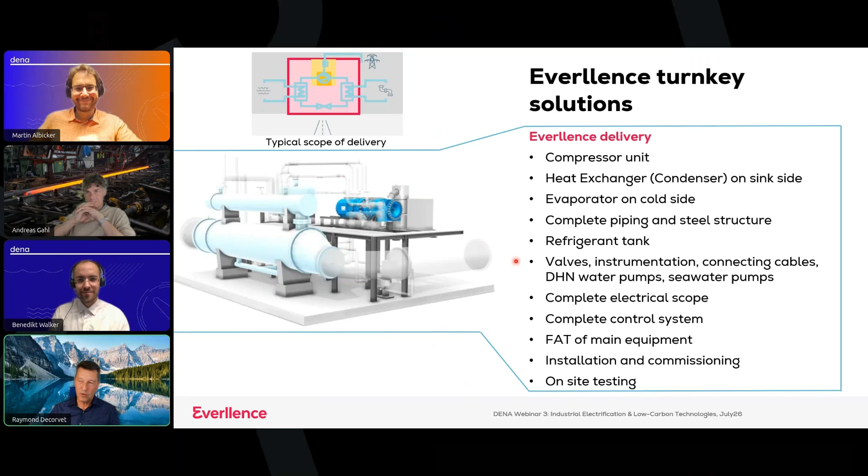Okay, Everllence is providing a turnkey solution. This is my last slide, and we can provide all these many different types and turnkey solutions.

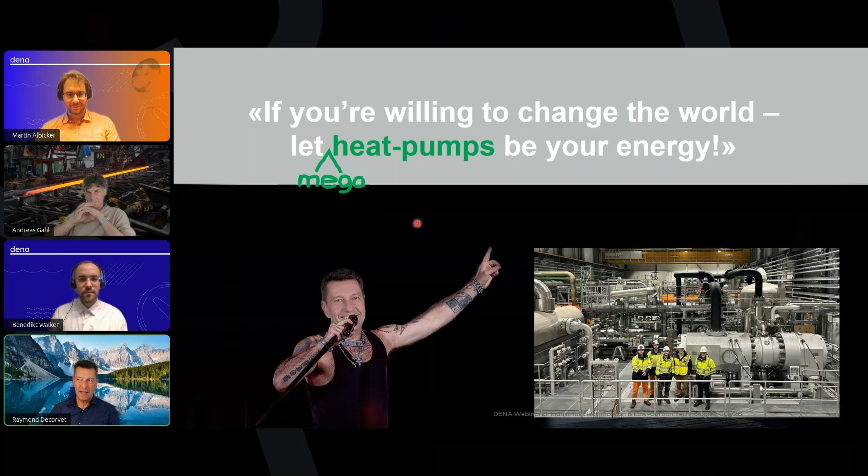I don't know if you know Robbie Williams. One of his lyrics goes, 'If you're willing to change the world, let love be your energy.' And I changed this slightly: mega heat pumps is the technology for the future. Thank you very much. If you have any questions, I'm happy to answer.